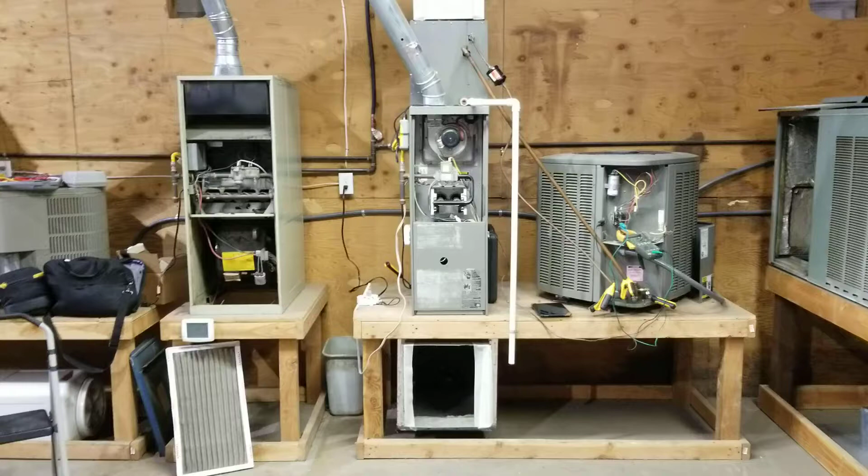All right, everybody. This is one of our test units that's in our test facility that we use for training. We have different units of heat pumps, package units, splits, 70% furnaces, 80% furnaces, and some 90% stuff in here too. But we use this for demonstration a lot.

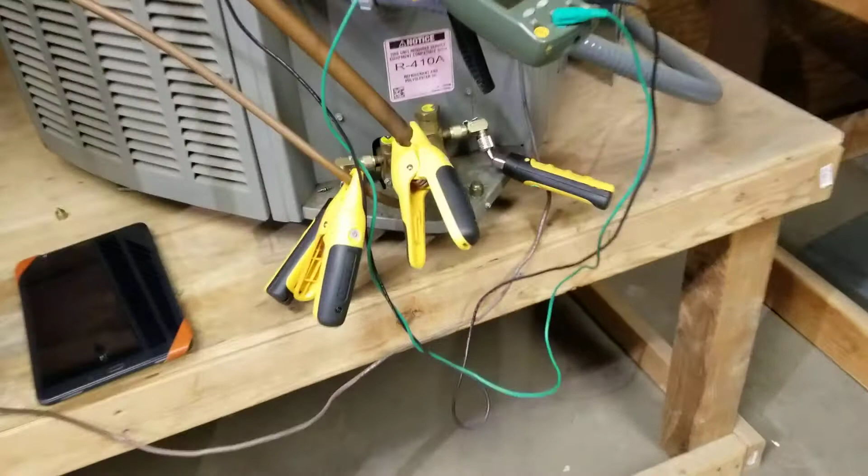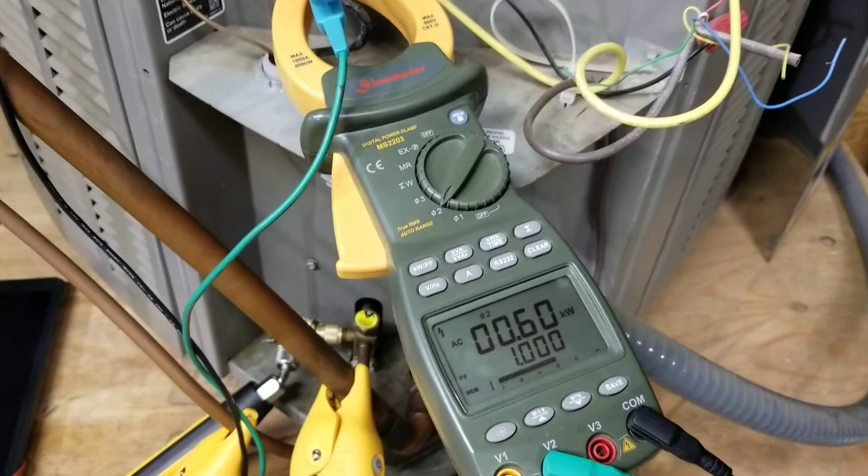You can see I've got my Fieldpiece set hooked up to it, and I'm using the angled quick connects. Very easy to do. I got all my readings. I've got my digital meter already hooked up to it, reading amps and volts and stuff, so we're all set there. This is a G40 furnace.

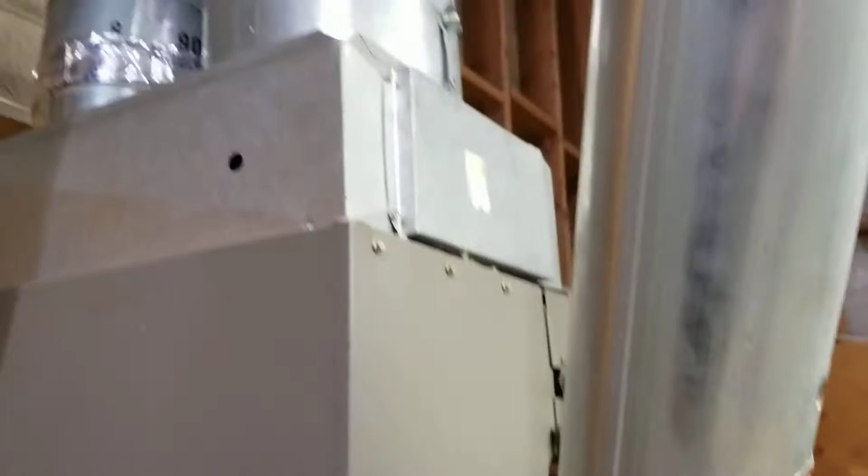It's a Lennox furnace. I also have my digital psychrometer, which is giving me my enthalpies coming off of it, and I also have another one up there in the supply that's reading the supply air coming out.

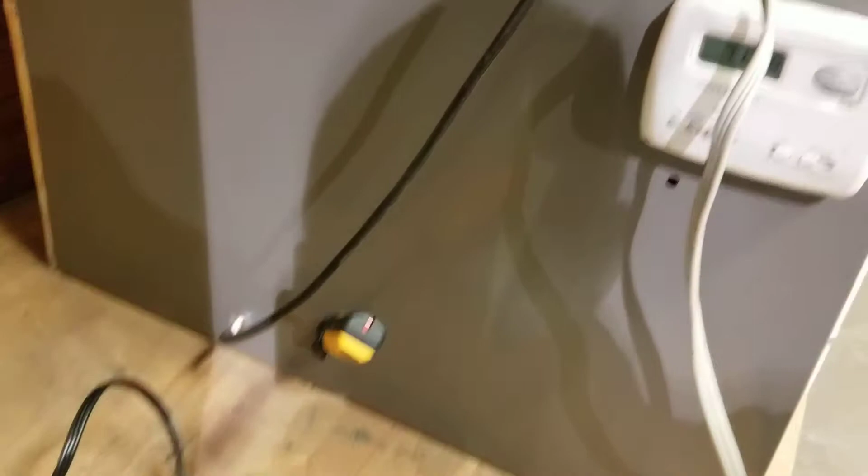I also have a manometer hooked up, so I'm taking my total external static pressure at the furnace there, at the coil down here, and as you can see it's running right now 0.47, 0.48, so just under a half an inch, and that was with no filter.

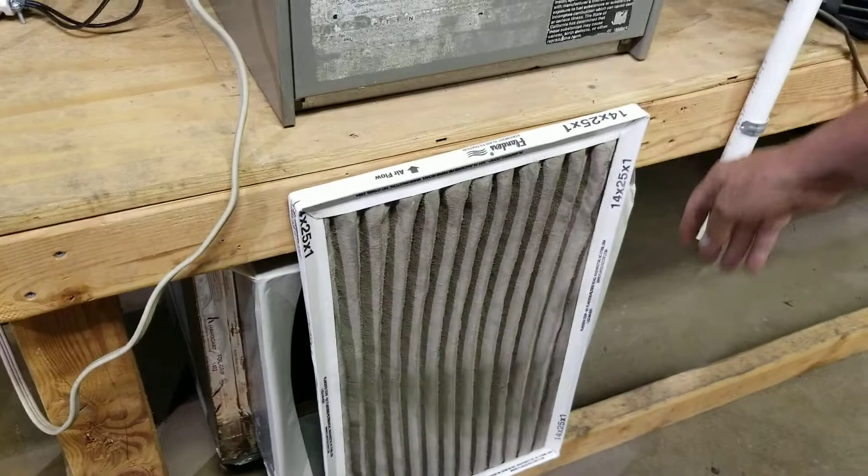Now we're going to put a dirty filter on it. Slide it over. There you go. So now we got a dirty filter, and so the air is just sucking in, and that was a filter we pulled out of somebody's house. Now I'm pulling 0.74 on my static pressure, so static pressure has increased quite a bit.

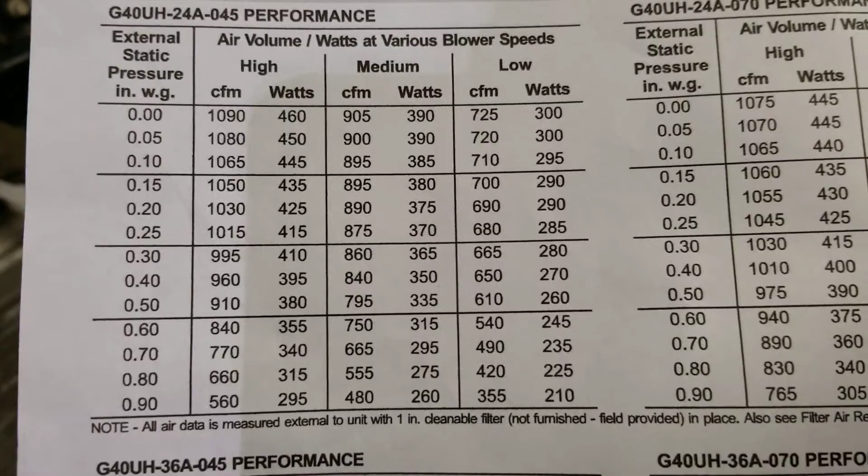So let's take a look at what we actually have. If you look at this, at 0.5 inches of static, we're running 910 CFM, but at 0.7 we're actually running 770 CFM. So that's the difference between a clean and dirty filter. I'm moving a lot less air, so we'll just pull it off.

The unit's been running for about 10 minutes, and we've had a chance for the pressures to equalize. I'm going to go ahead and turn my tablet back on, and it should be hooked up to our readings right now for our system. We'll see what we're getting. This is a 1.5 ton unit, and I plugged in the 910 already.

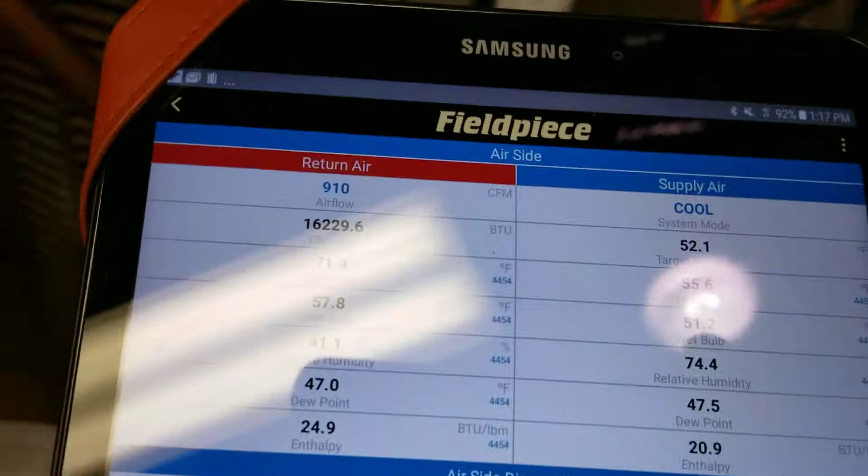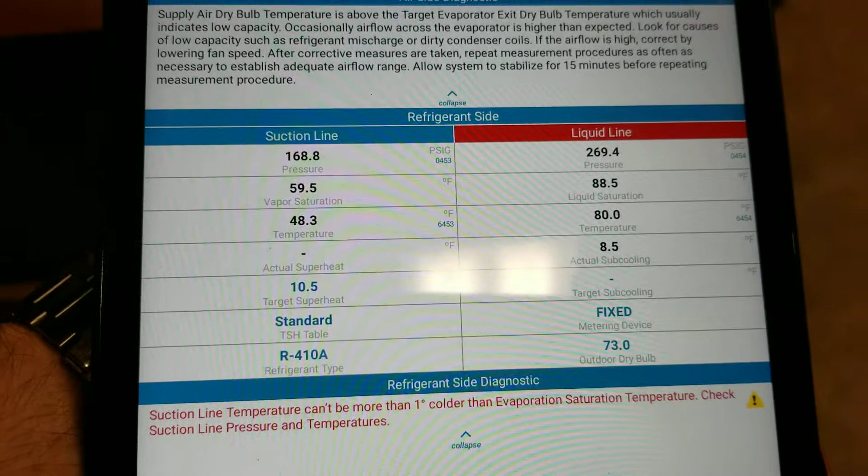So let me get this so we're not getting the light in it. At 910, I'm getting 16,000 BTUs out of it. It's a fixed rate orifice, and I'm getting 168 on the suction pressure and 268.7 on the liquid line. We're supposed to have 10.5 degrees superheat, but we're not getting any superheat at all right now. And according to this, I'm not even getting any subcooling.

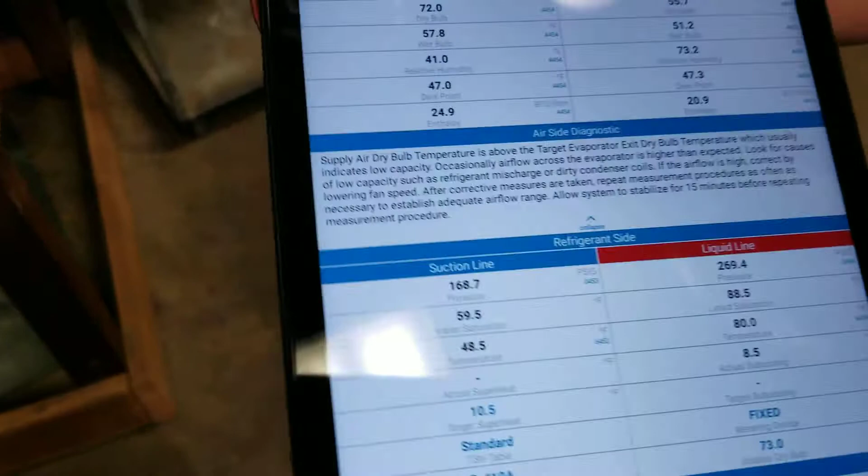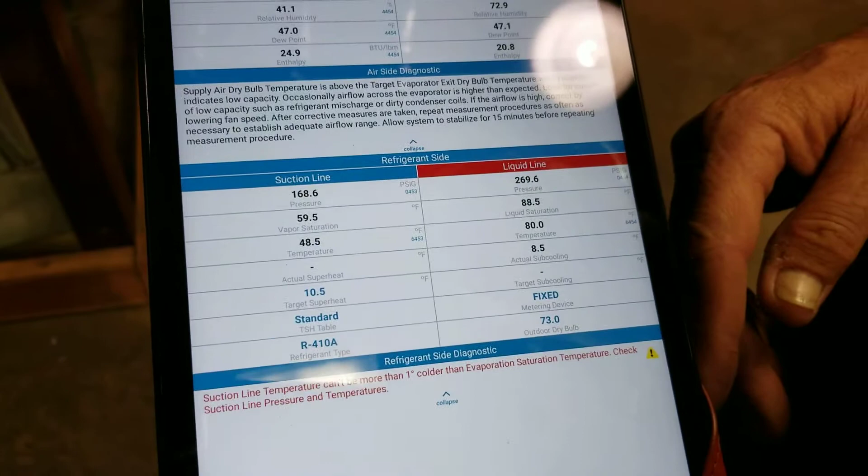It's not reading subcooling. Let me try turning the gauges on and off, but I'm getting a temperature, so that just tells me the temperature's not enough to show actual subcooling superheat. So let's see if we can get this to pick up a little better. Nope. So our actual subcooling, I'm sorry, is 8.5, which isn't too bad for this unit.

Considering it's a Lennox, they charge by using the approach method, and I didn't do the approach method on this one, but I wanted to show the BTUs, that I can actually go in and get the target BTUs, what the unit's actually pushing out, which is 16,000 currently.

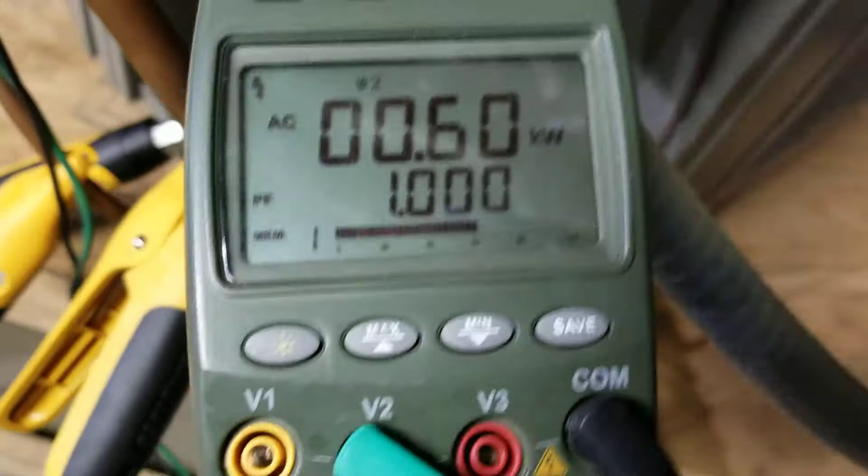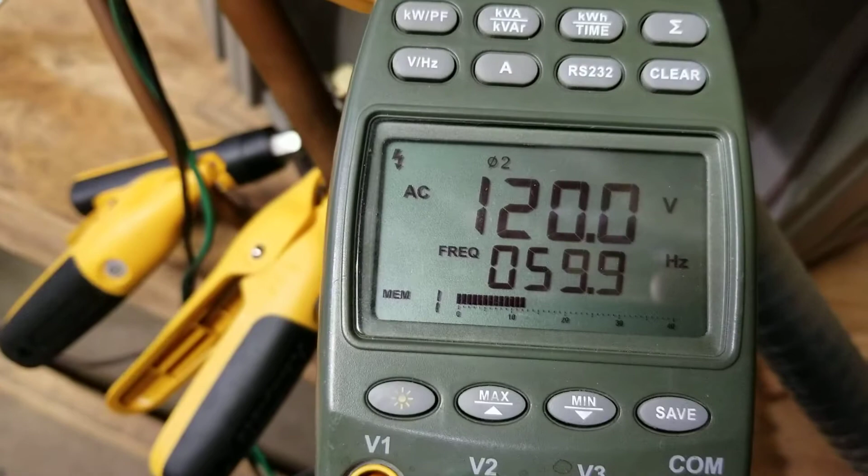The charge on this unit I know needs to be adjusted, and if I look at this right now, we're running a power factor that bounces back and forth between 0.95 and 1, so I'm going to call it 0.95 for our power factor. Then all I need to do is get the voltage and hertz. We're running right at 120, and then I need to get my amps.

And the amp draw on this unit is 5.2. Do the same thing on the other side. Get our amp draw. Again, 5.2, and everything else should be the same on it. So we're going to go over and measure what the blower and furnace is doing.

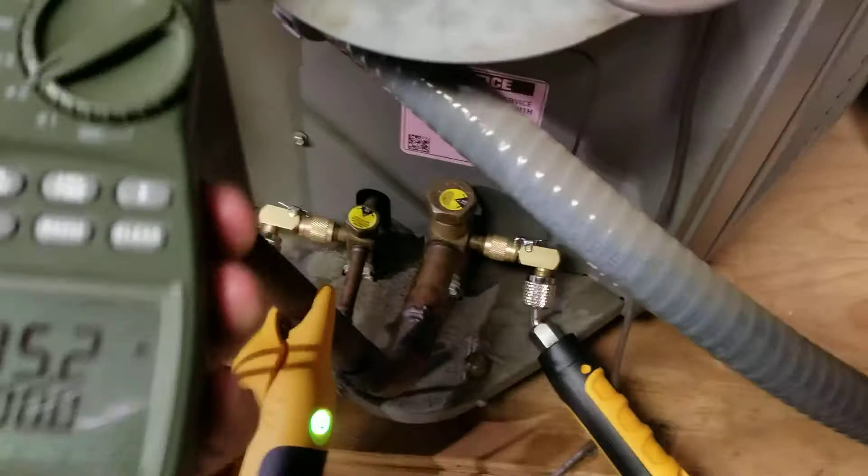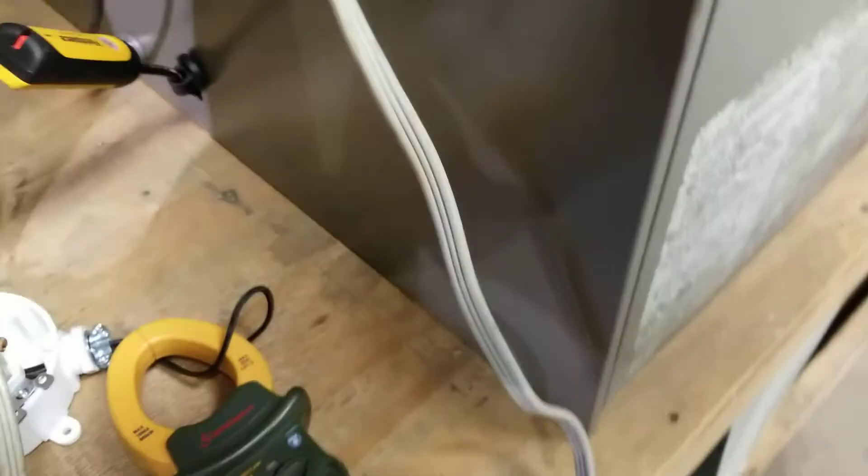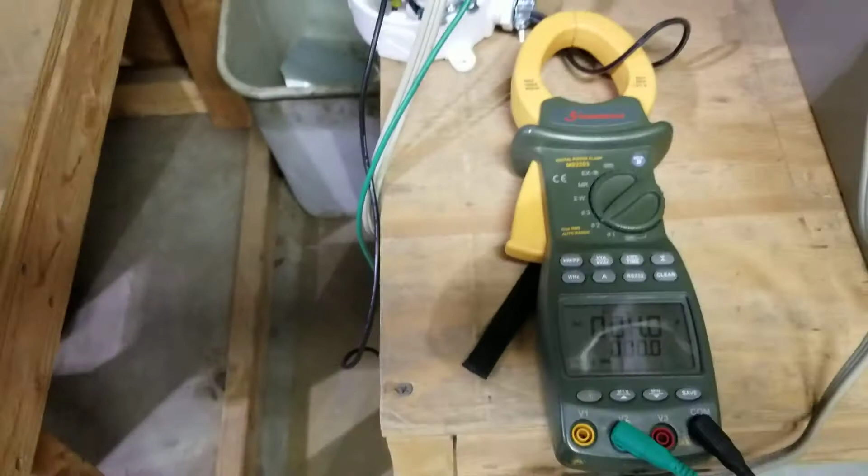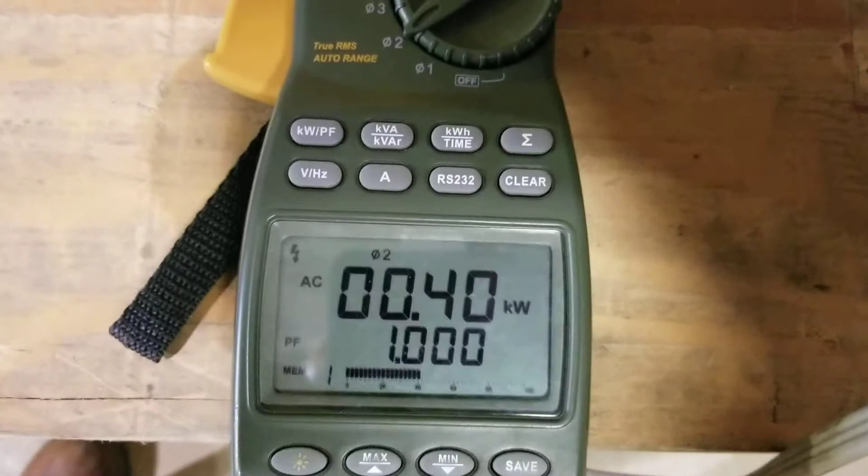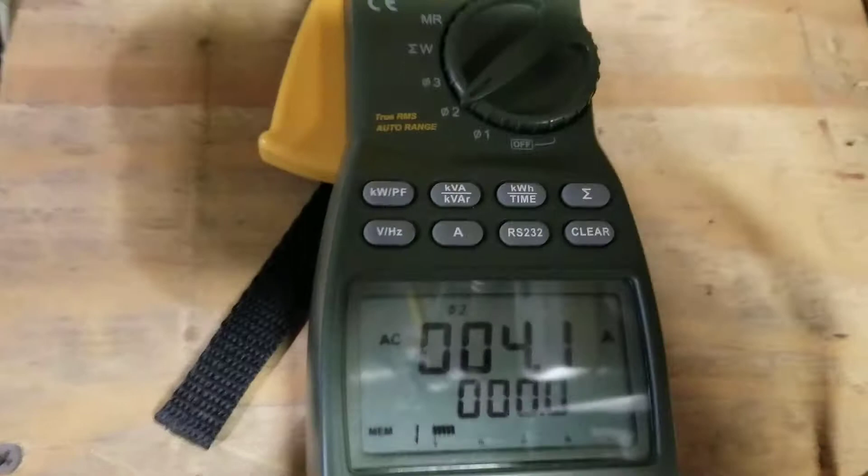Amp draw is 4.1. Let's put that filter back on it, and let's see what the filter does to the amp draw. So you notice the amp draw is dropping. That's because we're cutting off the air, and the blower motor doesn't have to spin as hard. And if we look at our static, 0.74.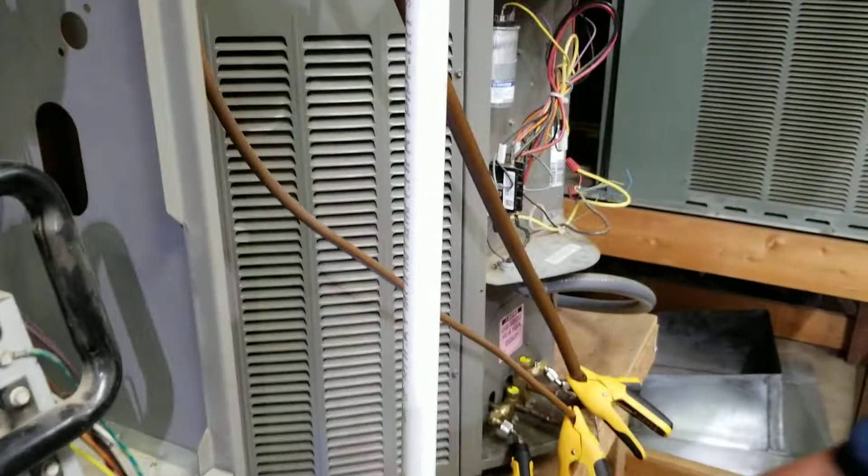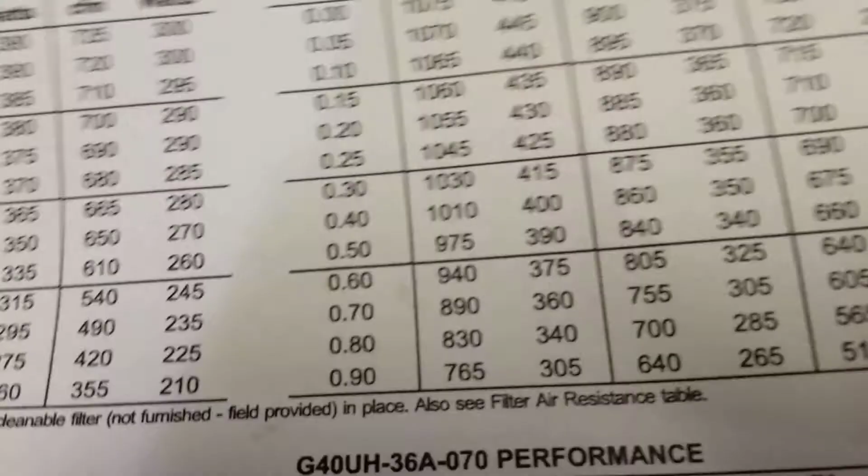So on my tablet, I'm going to change the CFMs. Because what did we say it was at 0.70? Let's look at the chart again on our fan chart. At 0.70, we're looking at 770. It's actually probably a little less than that, but we'll just go ahead and dial it into 770.

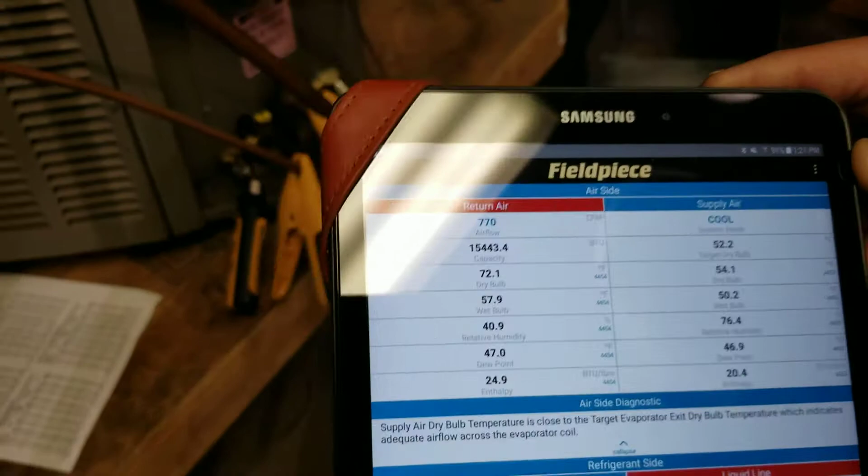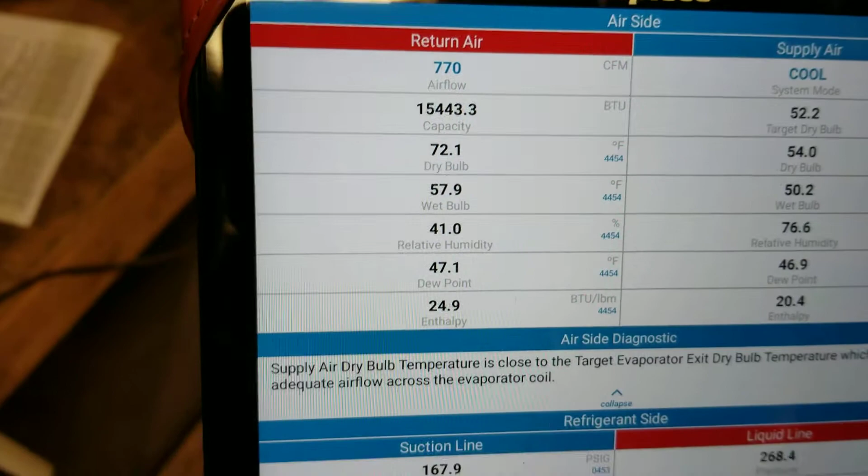Okay. Now let's look at what our BTUs drop down to. Down to 15,000 BTUs that the unit's only producing right now, if we have that plugged filter on it. So you can see what a change. We lost over 1,000 BTUs easily just because of a plugged filter, so the unit's going to cool less. And this is a 1.5 ton. It'd be even more profound if it was a bigger unit.

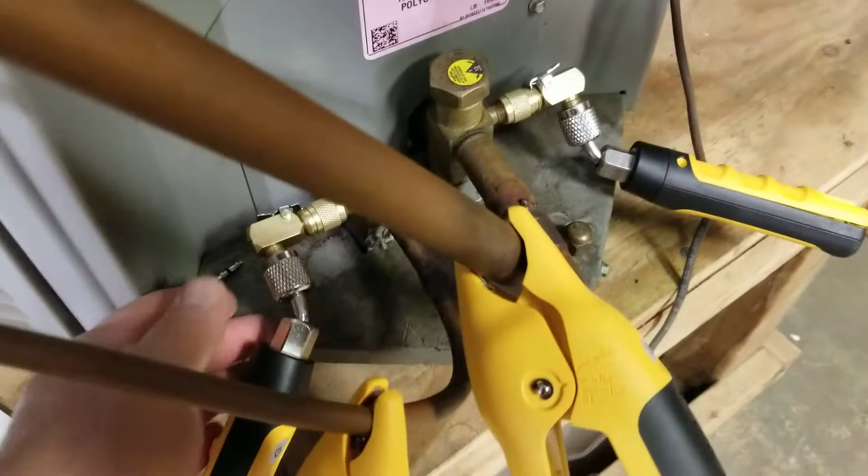All right, thanks. Oh, by the way, I just want to show real quick how these Kinex work to get them off. All you have to do is just clip on that, and that's it. That's all the refrigerant that comes out of that. No hoses. And then the same thing on the suction side. It just pops right off. A little less pressure on the suction side.

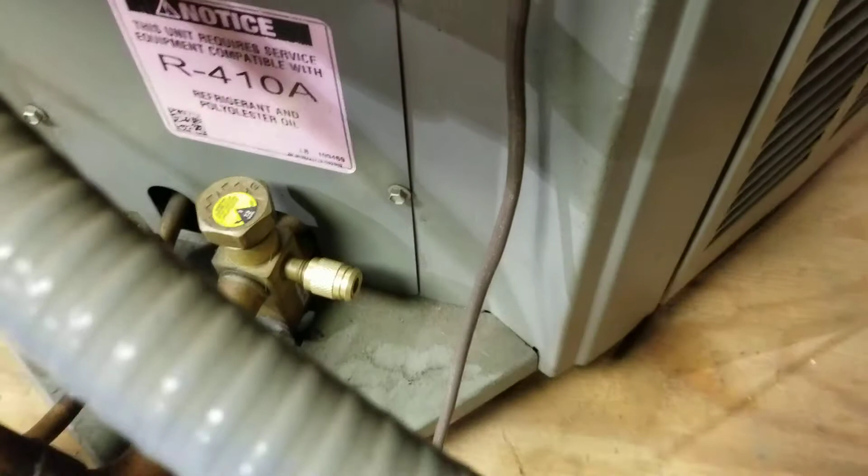And to reattach them, you just push them back in and they clip. So you just got to give them a good solid push and they'll clip right back in place. Really good. If you ever got to get low loss fittings, this is the low loss fitting to have.